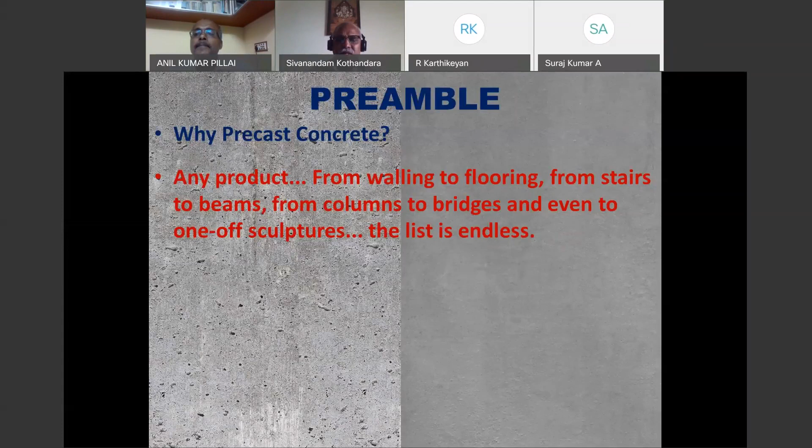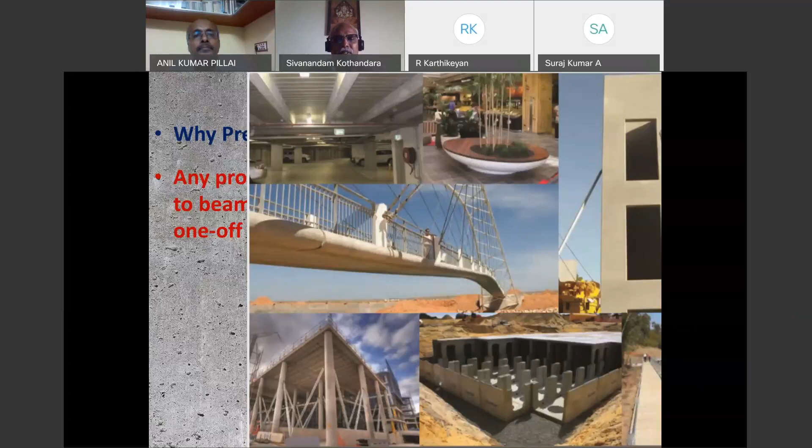But today that is all ruled out; it is possible that we can create any form as we feel, as we like, as we will. And that's what we see in the different forms of structures here. Here it is a residential complex, office complex, in which we find the finish of concrete is something like metallic. And here again we find a very architecturally aesthetic finish has been brought out of the precast construction.

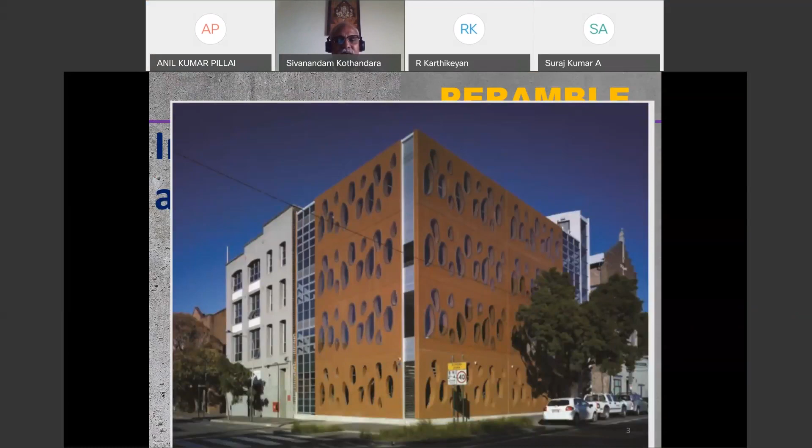And here we are having a look at a pedestrian bridge. It's a very recently completed structure in Philadelphia, which won best non-highway bridge under the Precast/Prestressed Concrete Institute 2020 Design Awards program. And here is the same bridge under construction.

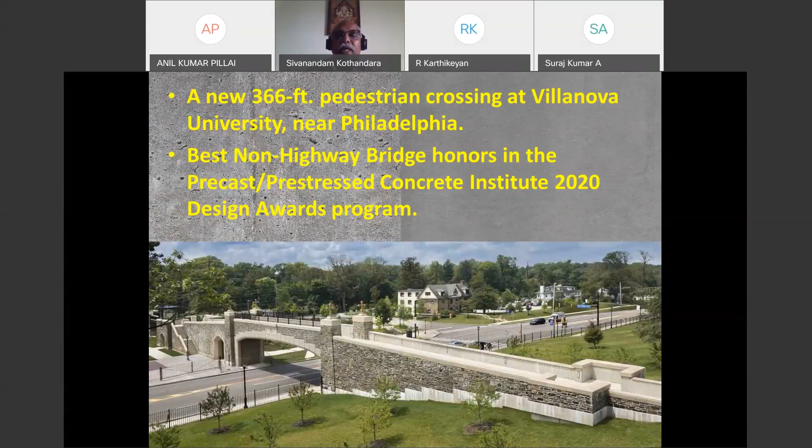So generally, after looking at the finished product, we are very much fascinated to see the precast buildings and structures, but the extent to which we are practicing it in the industry is certainly very minimal. And apart from finish, we also say that we minimize the time. Once we minimize the construction time, we maximize our profit and so on and so forth.

And here there is a small comparison between the time taken by in situ construction and precast construction. But it is only an indicative percentage of time saving. It is always in the hands of the engineers and the team; they can try to widen the gap between these two ranges of time.

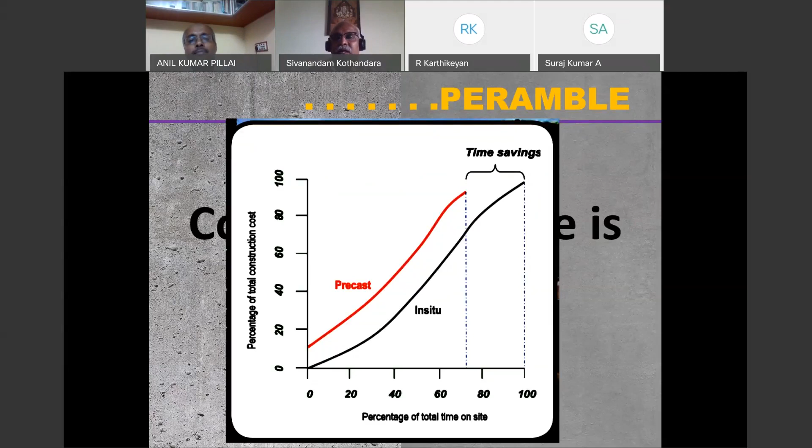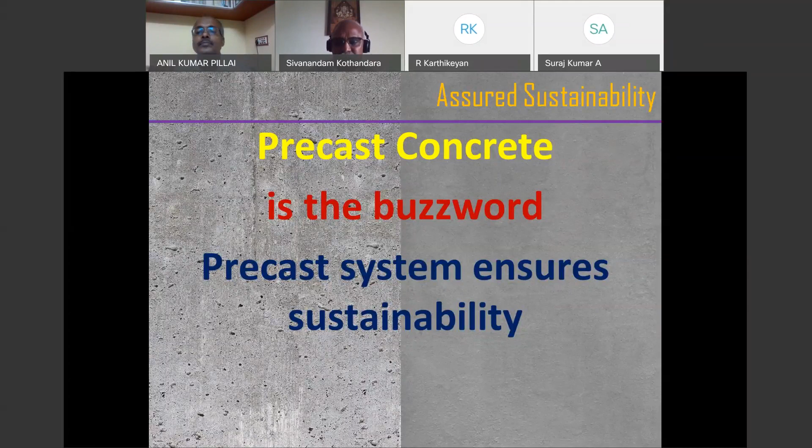Here is my essential perspective on why we should always look for precast concrete rather than in situ construction. The main underlying principle, what I very seriously believe, is sustainability. That is the very important thing. Now, the concrete has to perform in three different ways while it is in service, and we should try to understand that.

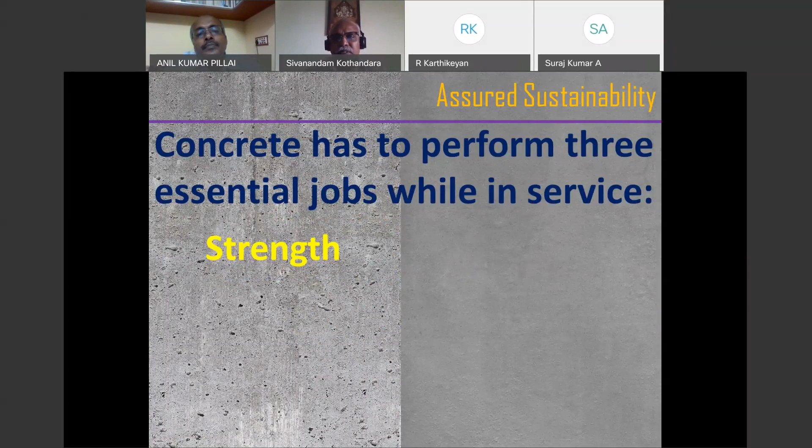One is that concrete should have adequate strength as per the designer's recommendation. The second performance of the concrete is that it should have adequate bond strength. Unless concrete is able to adequately hold the steel in its position, the stress transfer cannot effectively take place, composite action cannot be ensured, and the structure cannot perform its job. Therefore, a minimum bond strength should exist at the concrete and steel interface.

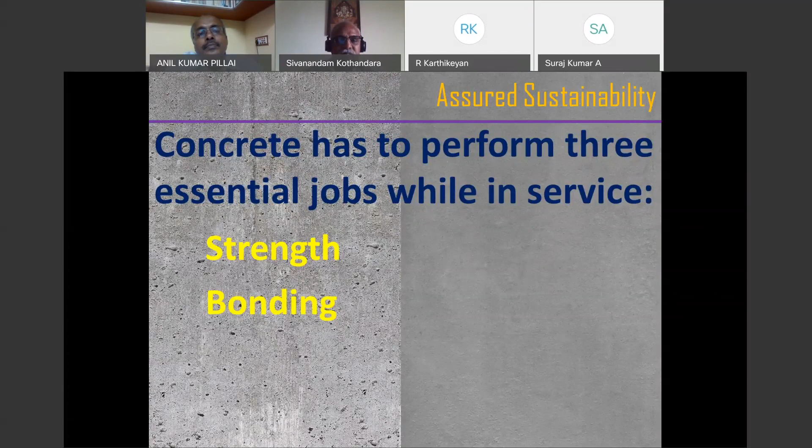And the third one is durability. These are the three essential qualities concrete should possess so that the intended purpose of a reinforced concrete system is achieved. The list looks very small, and of these three categories, the first two are related to the mechanical characteristics of the concrete: the strength, essentially the compressive strength, and the bond strength.

To satisfy these two criteria, today we are not having any difficulty. There are no issues in achieving the desired strength or ensuring the bond strength, because nowadays we easily achieve M60, M80 concrete in the field, and even achieving 100 MPa strength in an average Indian construction site is not a tedious task today. And with high strength steel, ribbed bars and all, ensuring bond strength is also not an issue.

The third one is durability, which is the inherent quality of the material. Compared with the mechanical properties, durability is related to the influence of nature, because when a material is exposed to the environment, it has to withstand environmental forces. Because of these forces, the material degrades. Once it degrades, the steel will start corroding, one damage will complement the other, and eventually the structure will lose its strength and stability.

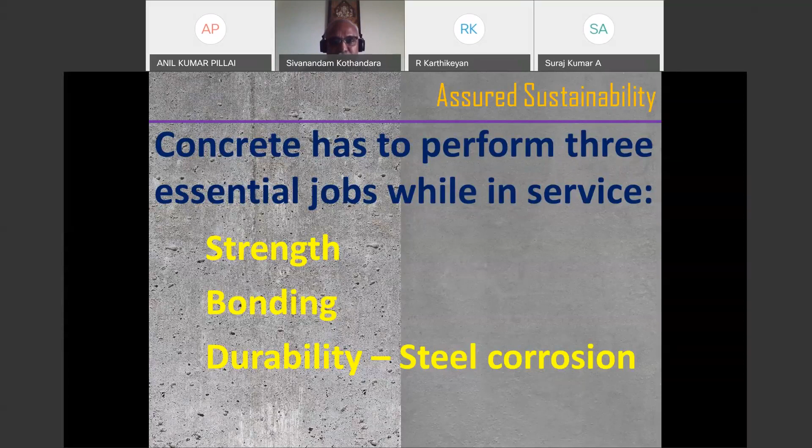So when we talk about why the precast concrete is important, we should understand and appreciate the essential advantages of having the precast concrete. In the Indian scenario, it's very important that we have the Prime Minister Awas Yojana, in which we try to ensure that by 2022 the homeless situation should not exist in the Indian subcontinent. That's the idea.

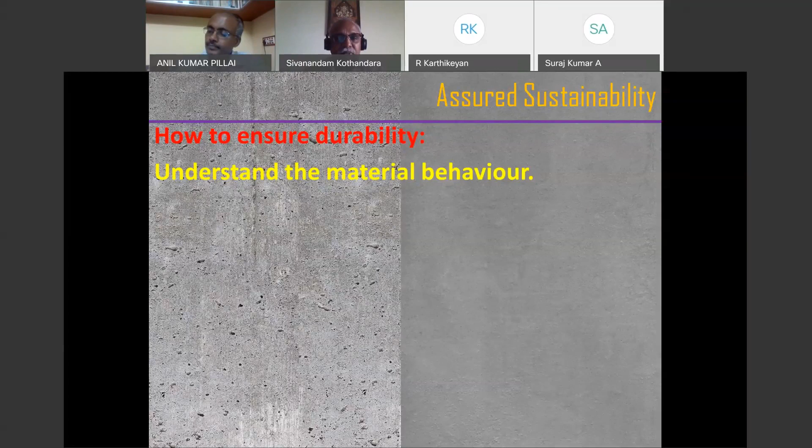And the first one is to understand the material characteristics very well, and under this material, not only the cement and steel, we should also appreciate the other components like sand as well as the coarse aggregate. In recent days, we are facing the problem of the scarcity of sand. But actually, the problem is not due to the non-availability of sand; the essential issue is that we are not able to understand what exactly the fine aggregate or the river sand is performing in the concrete system. And if you are not going to use the sand, then what substitute material can we bring in so that it can perform the role of the river sand? So it's only lack of knowledge and not really the lack of material. And similarly with regard to the coarse aggregate.

And the second most important thing is that we should appreciate the specification of the materials of concrete and the concrete making process. And in this regard, with great sanctity, we should understand the specifications, how we should prepare the concrete, and what the concrete making process is. Because these are the things we compromise at the construction site, thereby the quality is reduced. We are not able to ensure the required durability of the concrete. And follow the specifications of the concrete casting process and appreciate the curing process.

Here I would like to emphasize on the curing. Every time I emphasize the term curing, because we normally do the curing process by spraying water, putting the specimen in a tub, steam curing or chemical curing. There are a number of methods, like fogging, and many methods are available. But that is not so important to discuss at this juncture. The most important part is, why do we describe this as curing? Unless we do the process, the concrete is already having a problem that cannot be cured, and that problem will magnify over a period of time.

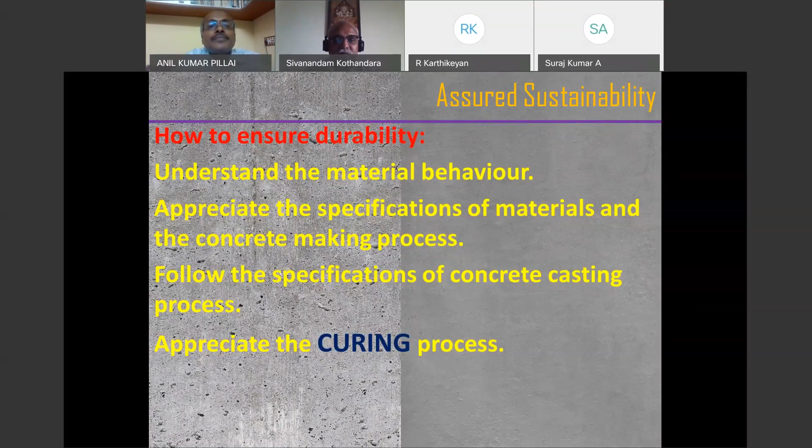Precast construction, I think now all of us would have. Yeah, sir, there is some problem actually in the audio. Sorry to interrupt, sir. Vasinat, can I mute Dr. Sivanandam sir's video so that it will help us with the relay? Can I mute your video, sir? I will do it from my end. So that you will have bandwidth also, sir. Yeah. So there was an audio problem.

Please continue, sir. Yeah. Shall I continue? Yes, sir. Please. Yeah. You can, sir. Yeah.

You're talking about the curing process. Yeah. And of course, then we should also maintain the system, the concrete continuously in a proper manner.

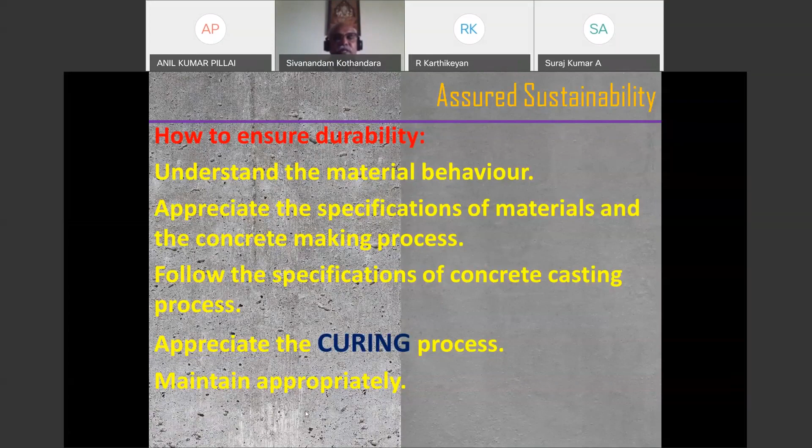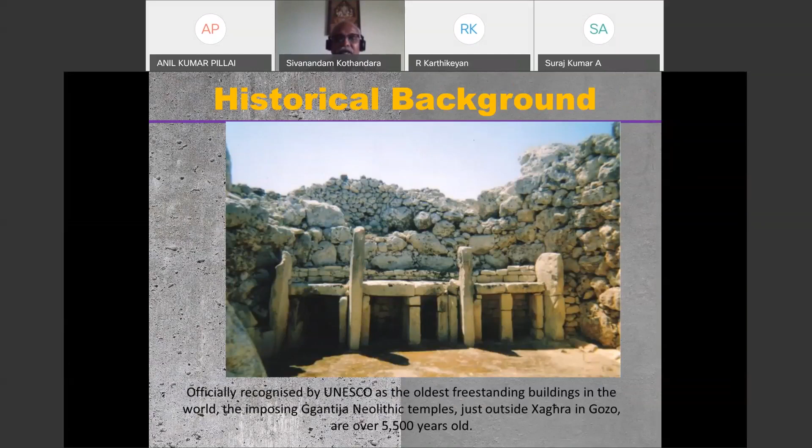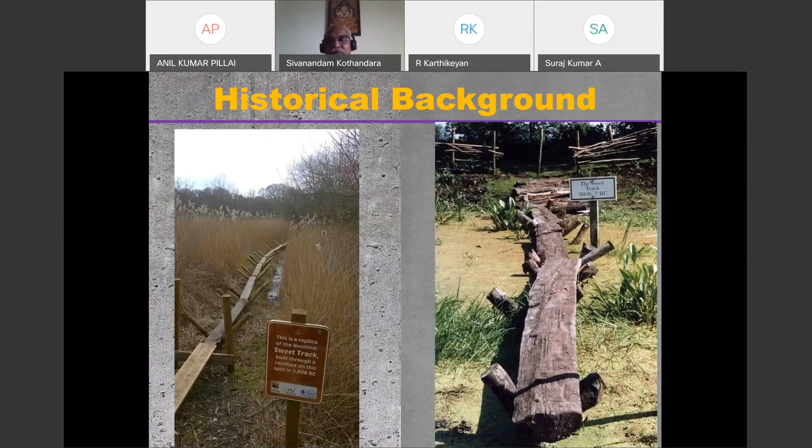Therefore precast construction is not an altogether new concept or idea, but we have been practicing it as civilization grows from the beginning. Over a period of time, due to technological growth and changes in our concepts and approaches, things have been modified, and I think we are closing the cycle.

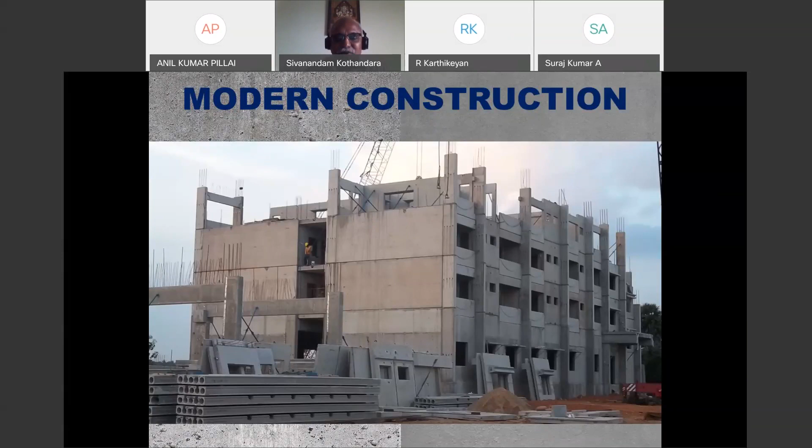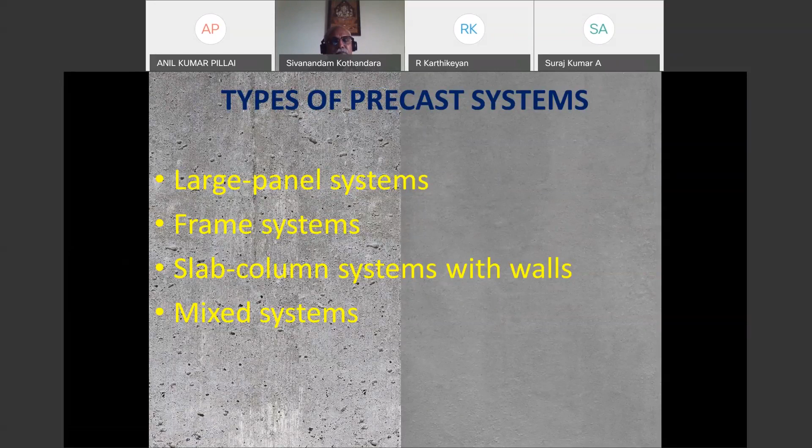Coming to the type of systems, fundamentally there is the large panel system, the frame system, the slab column system with walls, and the mixed system. These are the things. Okay. Now I'm coming to the large panel system. A slab almost as high as a small dwelling house may be lifted and placed in position.

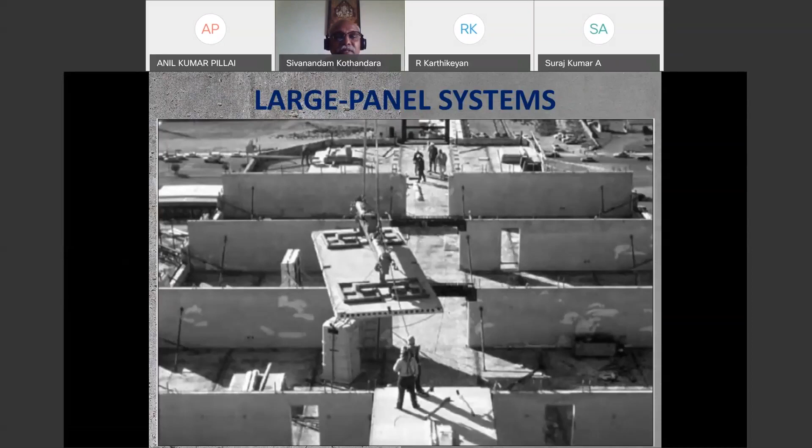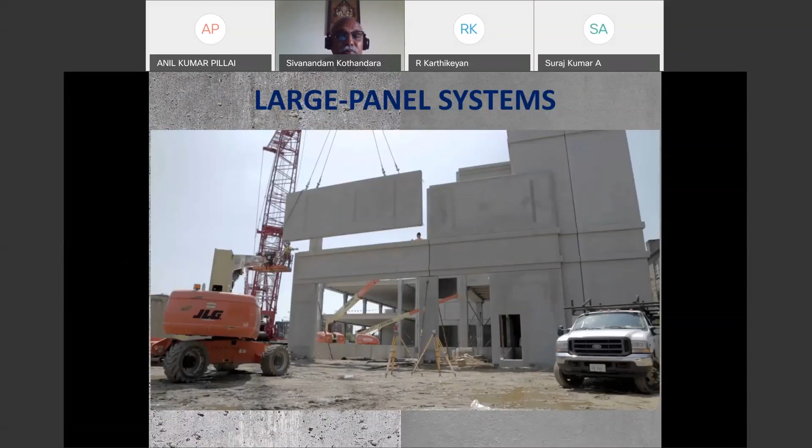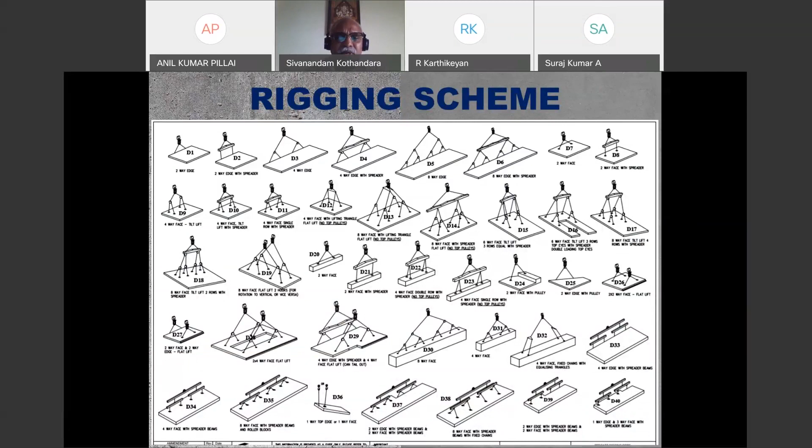We see some photographs here. Not only the size is impressive, but also the surface finish, which is very important. Particularly the finishes matter. The handling process is also given in every standard and reference book; we find the different methods of handling the materials or the precast elements.

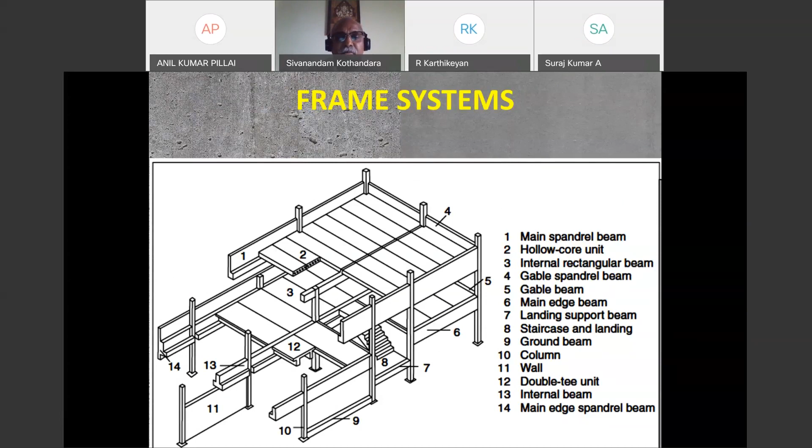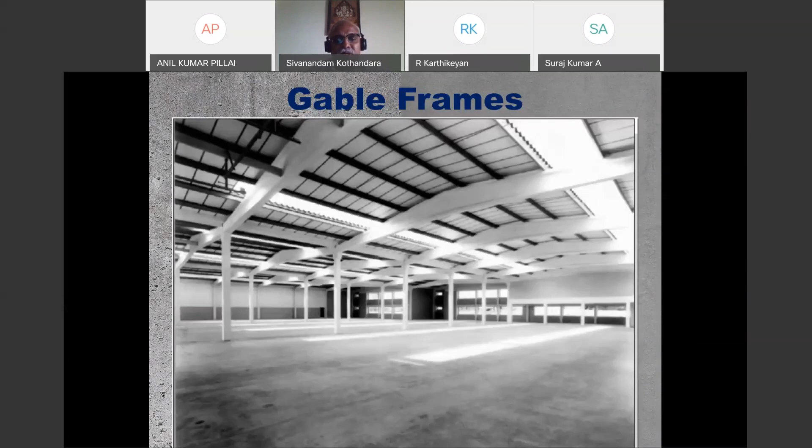Then coming to the frame system, here we see various components. Right from the footing to the rooftop, the components can be precast, transported, erected, and placed in position, and the structure is formed. Here we find portal frames and the gable frame structure in an industrial environment, where large space is created.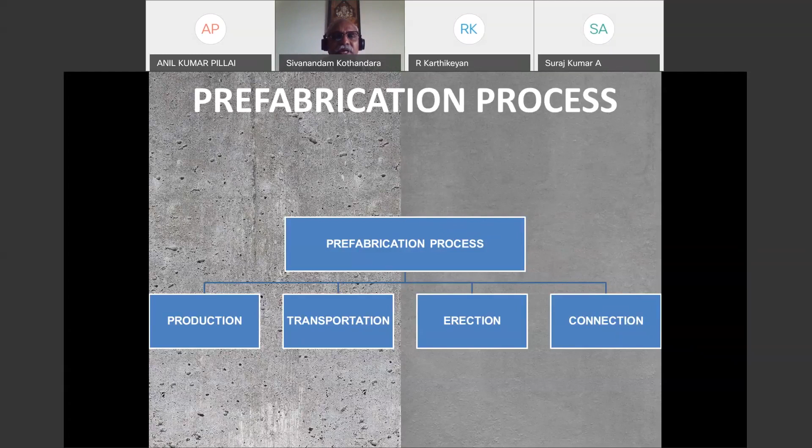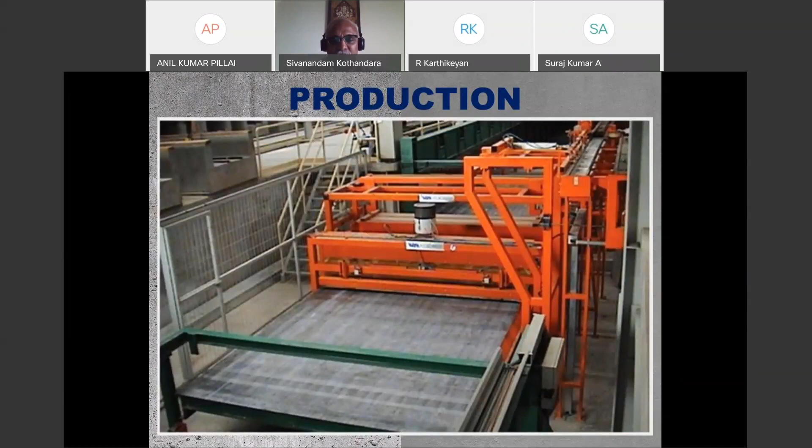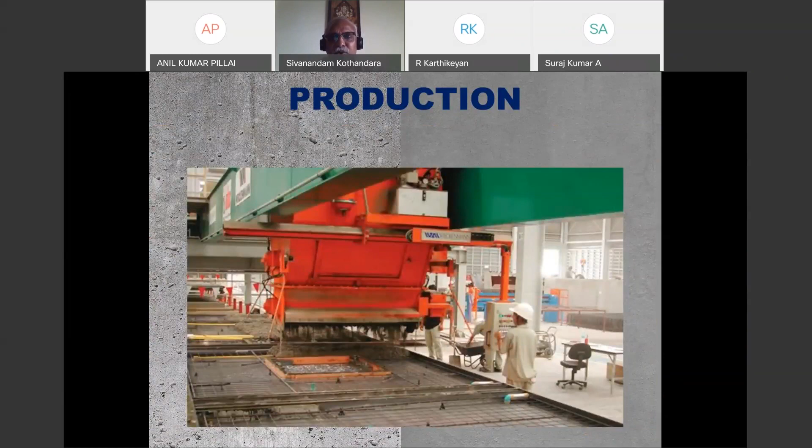Here we see the industrial environment with molds for casting various components, particularly the panels, maybe wall panels or roof panels. Everything can be cast in horizontal molds. The steel reinforcement is placed, concrete is poured, finished and cured, and then transported, erected, and so on. So that's what we find. Very large components are being transported.

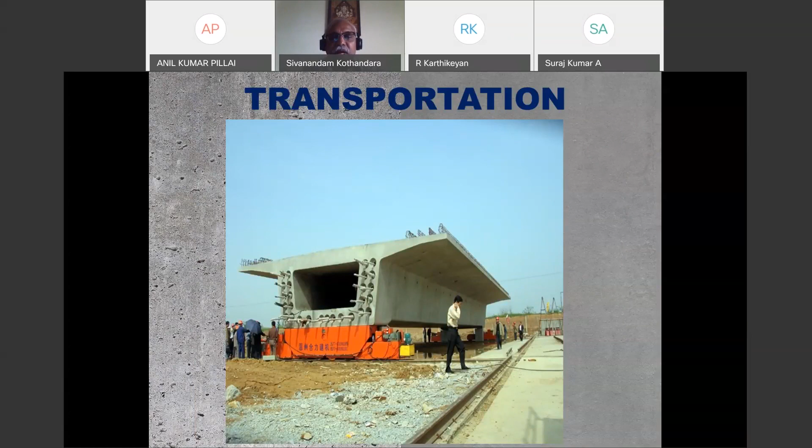In engineering, the main challenge for the engineers is the effort taken to safely transport such massive structural components. Here we see pre-stressed tendons in the photograph. When manufacturing precast components, we handle the material and components in a workshop. Then we transport them, for which, depending upon the nature of the job, we employ appropriate handling devices and cranes.

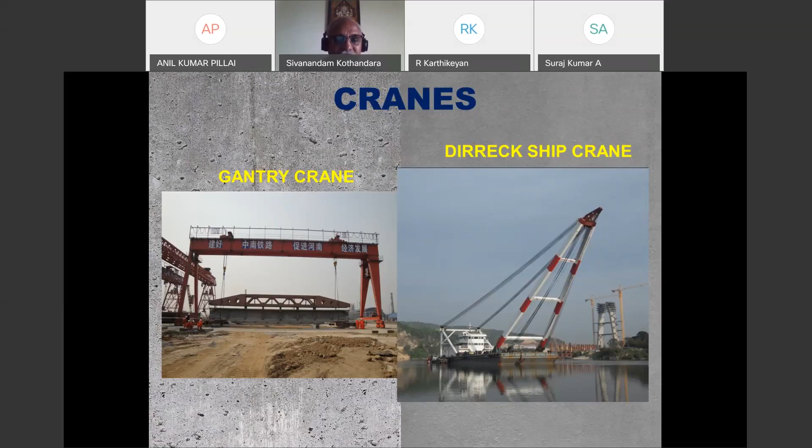Here we have the gantry crane, derrick ship, and self-launching erection crane. With regard to launching, I do not have personal experience, though I was involved in the construction of a precast cooling tower at Vizag Steel Plant, but such large, heavy components I have not encountered or handled.

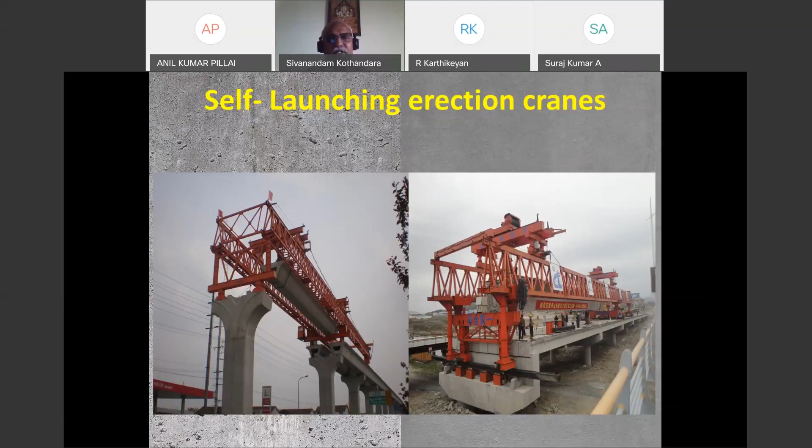In precast construction, the most important part is the connections. This is where we see the essential difference between reinforced in-situ construction and precast construction.

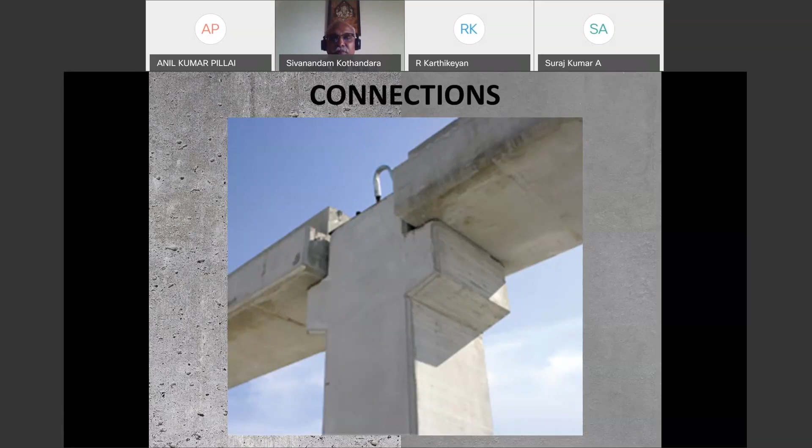With regard to different types of joints, it may be classified as a compressive joint. Here is a situation with a compressive joint, a direct compression, but it is subjected to different types of forces, that is shear. Then we have the tensile joint.

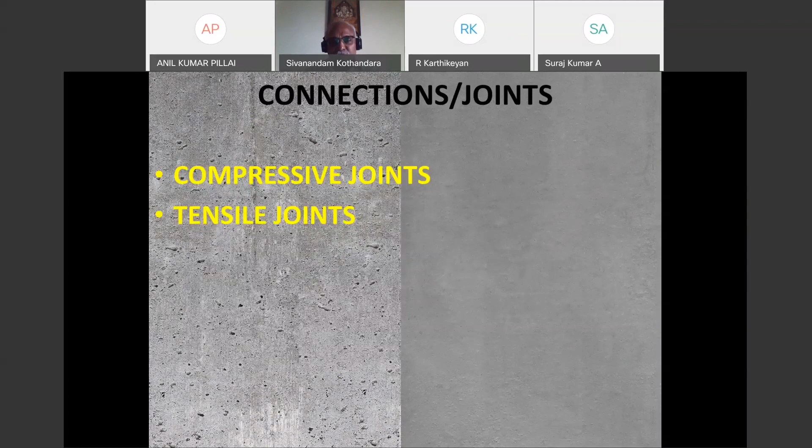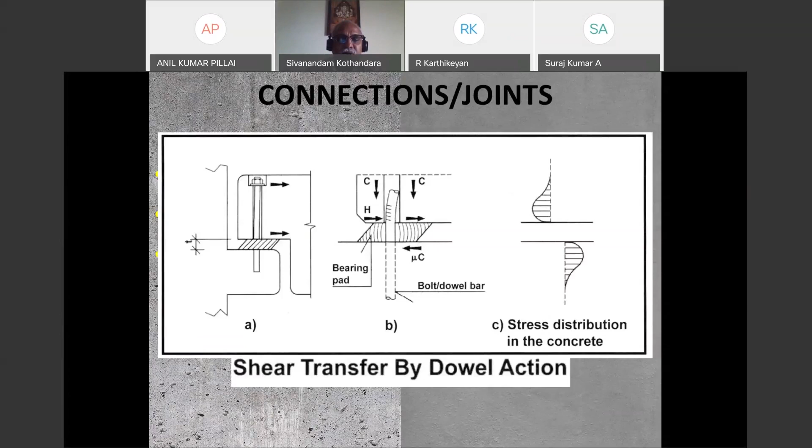The tensile joint connects two members to transmit tensile force, and shear joints, where the shear is transferred along the dowel action. This is how it is done. Then flexural and torsional joints. So these are the four types of joints we encounter, based on the nature of the force being transferred from one member to the other.

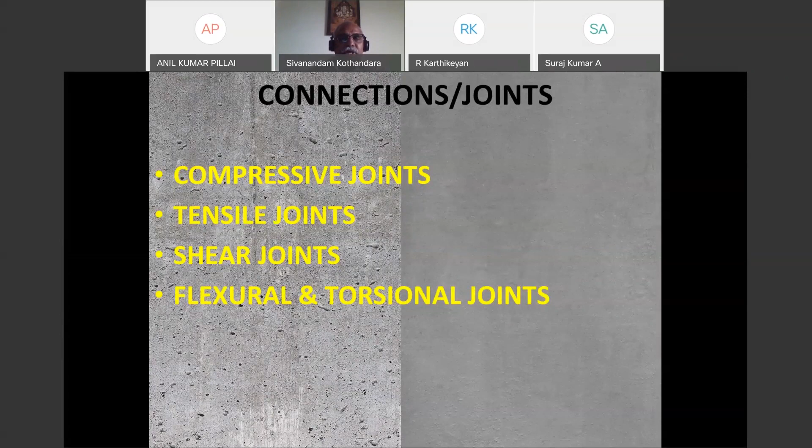With regard to the direction at which the joint is affected, we have the vertical joint and the horizontal joint.

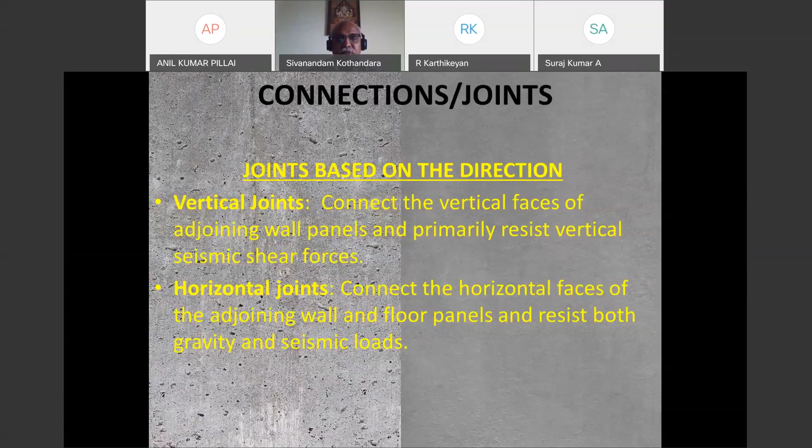Based on the nature of the construction method, we call it the wet joint and the dry joint. The wet joint is where in-situ concrete is done between the different components being united. In the case of a dry joint, we don't do that; instead we either do grouting or bolting, and with the bolt or nut the members are connected.

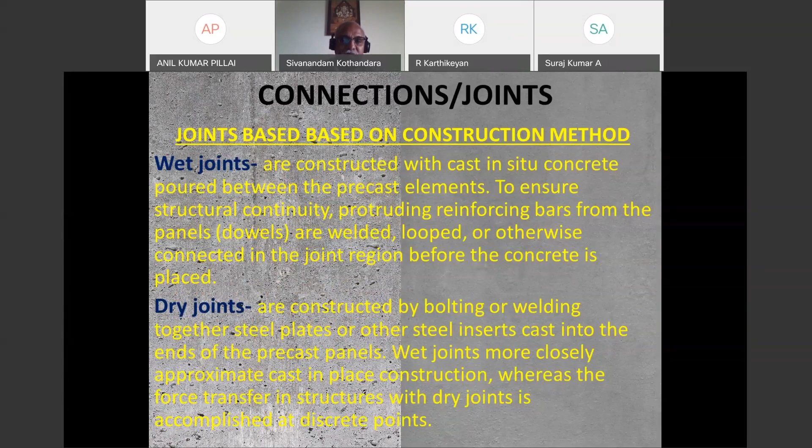Here we find a column-to-column connection, shown on the left side diagram. Two precast components are joined, and at the vicinity of the region we have steel plates and closely placed lateral ties, and there are shims, then we place it in position. The nut connects it, and the joint is packed with grouting. This is actually a dry joint.

Here again we find a beam-to-beam connection, and we ensure a plate is embedded at the time of casting itself. A steel plate is embedded, and then it is connected. You can also see the reinforcement details in the beam. It looks identical to a corbel, but the size is very small because the magnitude of load being handled is very nominal.

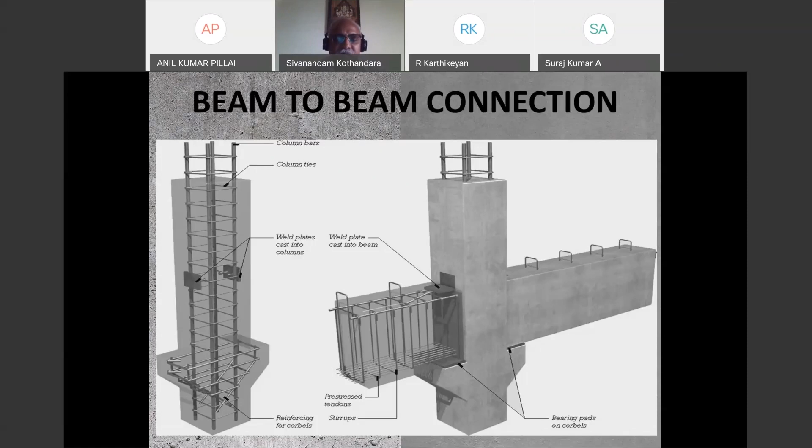Here we find the slab-to-beam connection, wherein the hollow core slab is placed, and at the joint we sometimes provide concreting, and grouting may also be done.

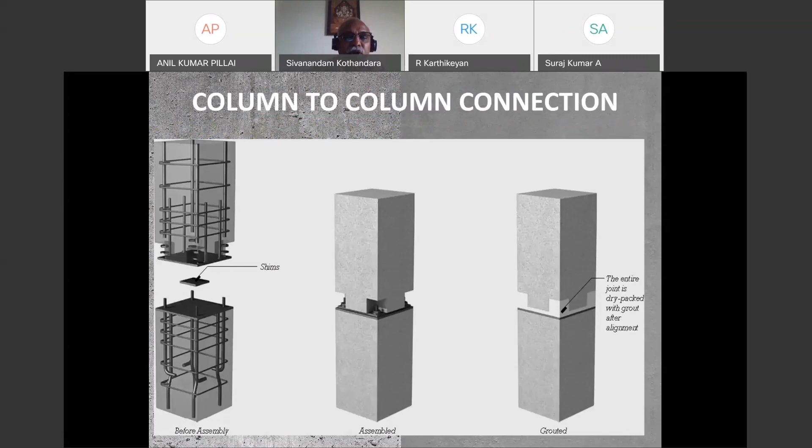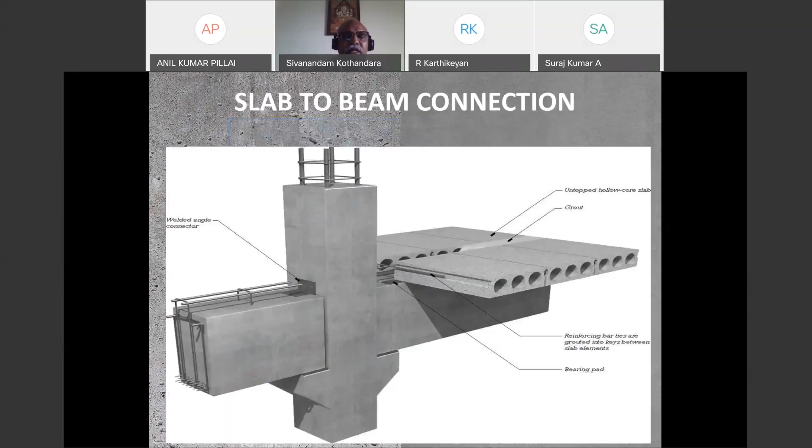So when we talk about the beam-column joints, we would like to share our in-house experience. This is the point I would like to discuss fundamentally. After having seen the preceding slides, wherein the components of columns and beams are connected but not monolithically constructed, structurally they are not capable of transferring forces from one member to the other.

If the components are monolithically connected, there is a possibility that moment redistribution can take place. What are the advantages of moment redistribution? Looking at design philosophies, we earlier had working stress design, then ultimate strength design, then limit state design, and now performance-based design. Performance-based design is practiced in countries like New Zealand and the US, but it varies from consultant to consultant and is not a widely accepted practice, because there are difficulties in understanding the underlying principles behind it.

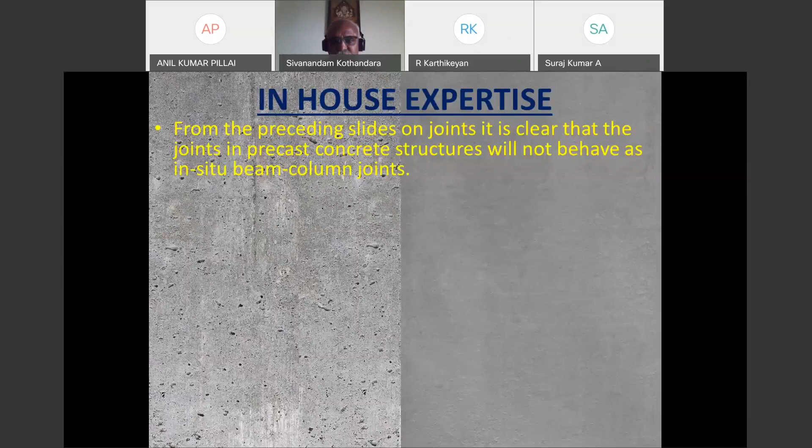Here we should recollect an important aspect: in precast construction, the joints are not really monolithic, which means the precast structure cannot be as efficient as frames constructed monolithically. But even then, it is able to exhibit a reasonable percentage of financial advantage, apart from other advantages.

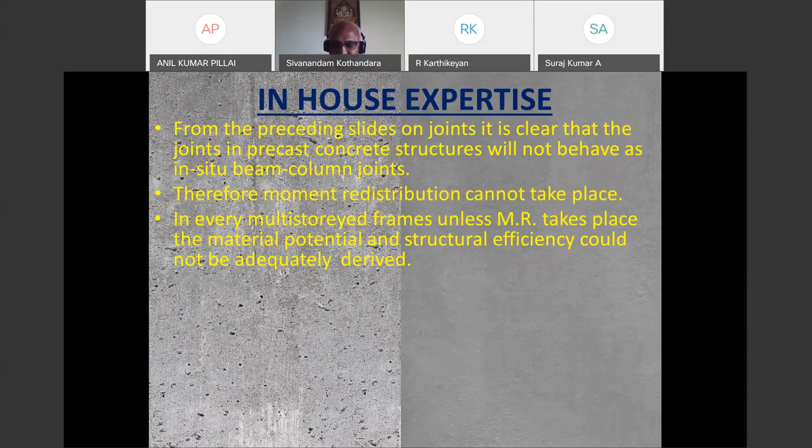Now, if you are able to ensure performance of the structure or joint almost similar to in-situ construction, the extent of advantages—technological and performance—will be really magnifying and mind-boggling. Towards that target, wonderful work was done, though it was actually at the MTech level; dissertation work was carried out.

In that work, we tried to imagine the actual precast construction situation, wherein the development length of rods from the beams—the bottom rods of the beam were bent up to the upward side, and the top rods of the beam were bent down and brought inside the joint. Of course, it is not possible to have a dry joint as in monolithic construction.

It should certainly be a wet joint. A certain amount of concreting has to be done at the construction site, but the extent of concreting done will be equal to the extent of development length of the total rod. If that is done, we can ensure that the joint will behave identical to monolithic construction—this we have experimentally verified, and it has performed satisfactorily.

So that's the beauty I would like to share with you. In fact, we wanted to get a patent for that process, which is why it has not been elaborately discussed here.

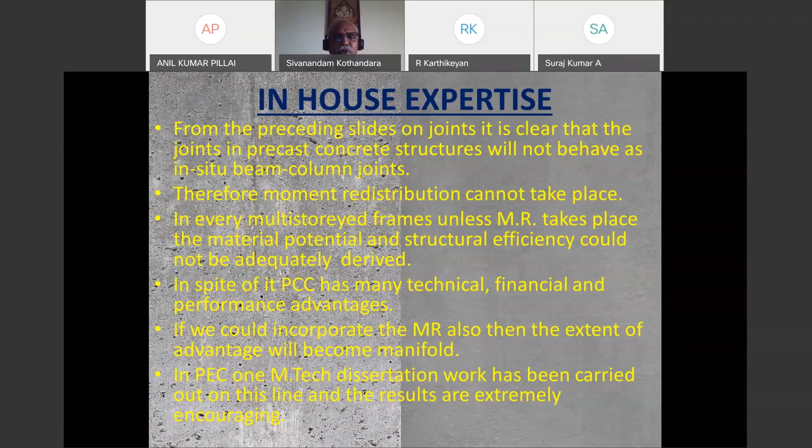Otherwise, the method of process was discussed with field engineers who had experience with precast construction, and they agreed it is possible that it can be straight away extended to field practices. If you are able to do that, the benefit can be extended to a very great extent.

All along we have been seeing slides where the background has a rough surface part and a smooth surface part. In this regard, we have also done PhD level work called the controlled permeable formwork liner, or CPF liner. We could discuss at length the historical background—how the first concrete was originally conceived, how it transformed after the introduction of the needle vibrator and poker vibrators, and how it is done today—but many things are forgotten and we practice a different form.

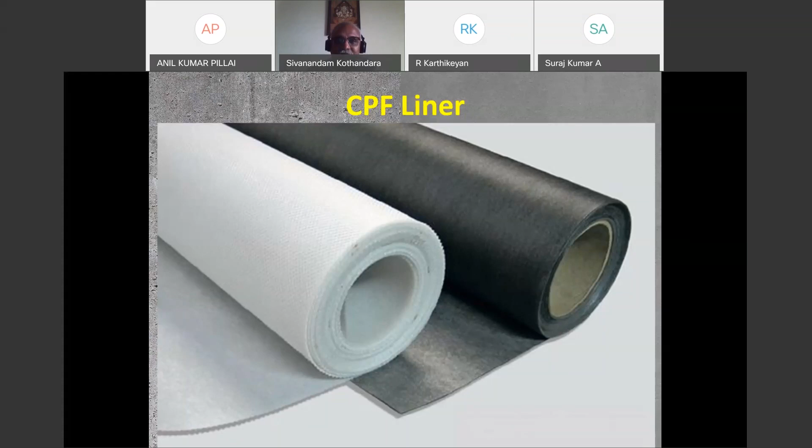Under the context of CPF, controlled permeable formwork liner, precast elements are manufactured in a controlled environment. If these liners are used in the molds, the purpose is not only external appearance—on the left hand side you see a surface with blemishes, pinholes and blowholes, while on the right hand side you have a smooth finish. At microscopic level, we estimated the surface irregularity: the one cast with the CPF liner had 2% surface blemishes, while the other had around 20 times more blemishes.

Not only the surface finish, but other characteristics are entirely different. This concrete, manufactured using the CPF liner, was able to exhibit wonderful durability characteristics compared to concrete cast with the traditional formwork. So this is the second in-house experience.

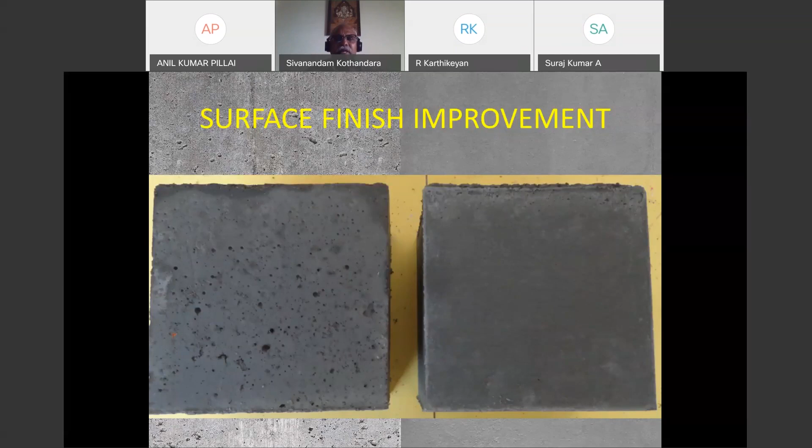And the third one is the material. Of course, geopolymer concrete is not only ours, it is being practiced everywhere, but in our institute, two of our faculty members have also been working on geopolymer concrete. These just bring the material.

With this material, of course, we know the difficulties and limitations of extending this concrete to the field, as in situ material this cannot be used. Curing is an issue. But if you imagine geopolymer concrete is practiced in a factory environment, casting precast elements will bring a lot of great advantages.

In fact, the most attractive part of geopolymer concrete is not only the technological advantage, it's a green material. It does not use Portland cement, and it uses a large extent of industrial waste, particularly fly ash and other materials, thereby we derive benefits for society. So these are the essential points I'm trying to bring in this forum, that is precast concrete.

Before I sum up my lecture, I would like to make a brief review that with regard to precast construction, we have been talking only the green part of that industry. Is there any red part on that side? If you try to find the answer, of course there are, but not all the more very serious issues related to precast construction.

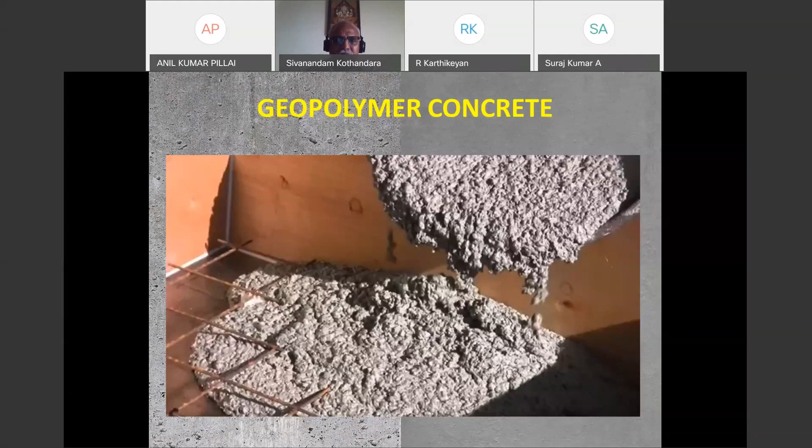Similarly, for major projects, particularly in the housing sector, we should focus our attention for the benefit of society. And in this regard, we have complete guidelines with us, complete guidelines.

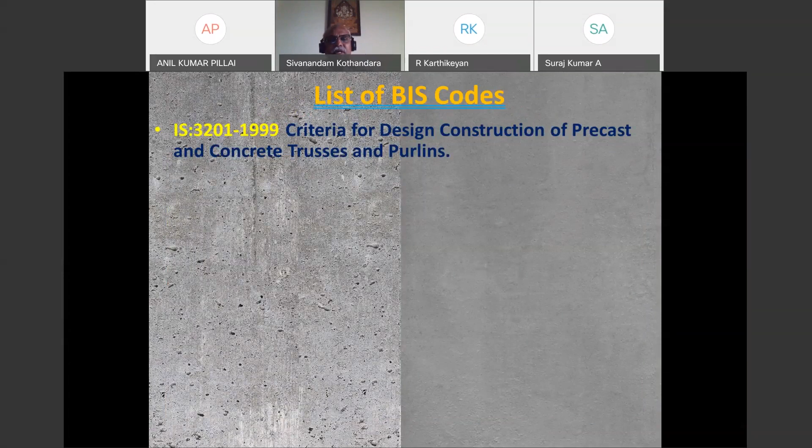Indian standards have come out with various guidelines, like design criteria for design and construction of precast concrete trusses and purlins, code of practice for composite construction, and glossary relating to modular coordination. Then construction of floors and roofs using precast double curved shell units. That's a very much fascinating item.

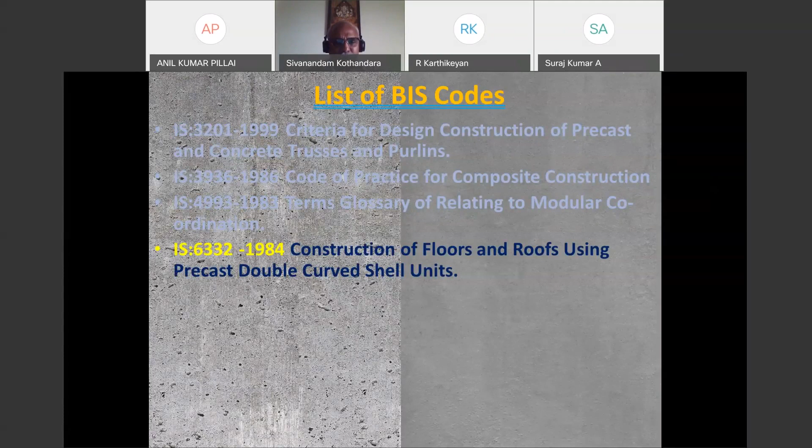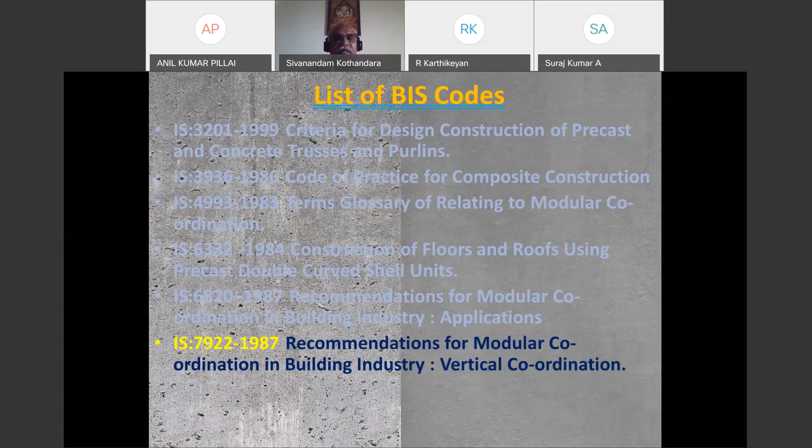And then for modular coordination, I have not discussed anything about modular coordination in my lecture. That's a big separate deal we should discuss about. So that is separate, we should do it: vertical coordination, then sub-modular coordination, design and construction of floors and roofs using precast, reinforced, pre-stressed concrete, and cored slab units.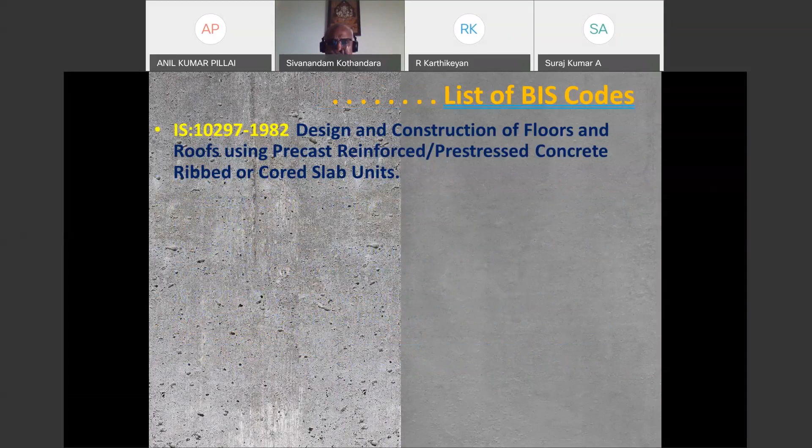Construction with the large panel prefabricates, design and construction of floors and roof, precast reinforced concrete planks and joists, floors and roofs, brick panel, and so on. Okay. Design and construction of roofs using the precast reinforced concrete L panels.

So likewise, in Bureau of Indian Standards, a lot of information is available. Nothing is left out. But the only thing is, now engineers should coherently and unitedly think in an appropriate manner, so that in the days to come, we should try to extend or do the practices of precast construction. If not 100%, a part of the structures may be tried. See, even in regular dwelling housing construction, we are not even using precast lintels, we are not using precast sunshades and so on.

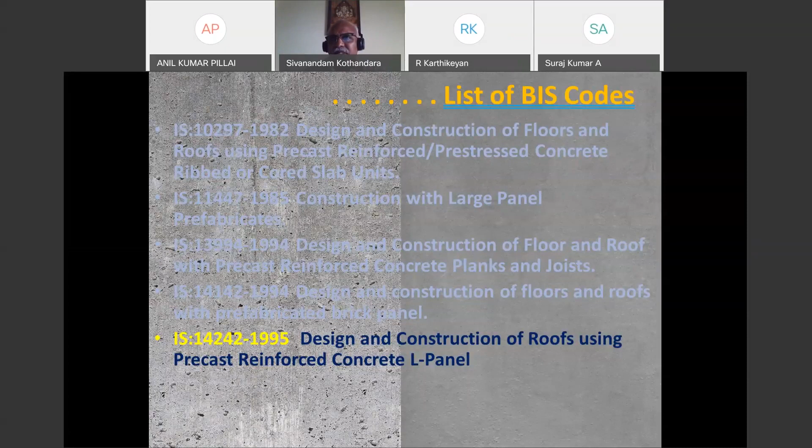So such ventures require a very simple deal of work, very simple deal. But still, we are always trying to do in situ. In the in situ construction, we miserably fail. We are not able to maintain the quality of concrete. We are not able to maintain adequate cover, not able to do the curing process, many such things. So at least if we try to practice precast construction, if not 100%, in a small way, in every simple construction, over a period of time we may try to extend it.

Unless we really appreciate what are the real technological advantages of that, and unless we try to enjoy our finished products, we cannot really have the dream fulfilled tomorrow. Okay.